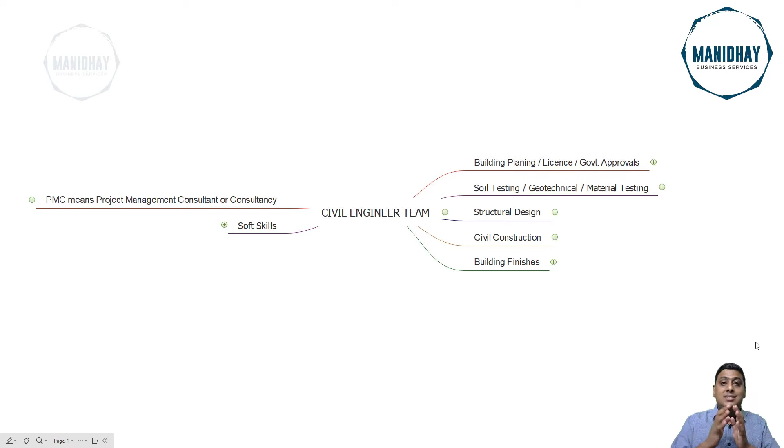In this session, we will be discussing more about the civil engineering team and how to build a team. This is very curious for people who are fresh in the market - fresh graduates, students, or people working for a company who don't know how to set up a team or a complete civil engineering team. I have covered only a few of the teams, you can name n number of teams. So as a basic civil engineer, if you have to put up a team, this is the team we are going to discuss.

We'll start with the first one: building planning, license, and government approvals. If you are a civil engineer, you should know how to get the license done for a client. If you don't know how to get the license done, how will you build the house for him? If you know how to get the license done, the client will ask you whether you know how to get the license. You will tell him yes, we have a team of people who work only for this, clarifying whatever the government officials need, and you will get the license done by the end of the day. If you give the client confidence, he will give you the job. Once the license comes, it is easy to take up the next job.

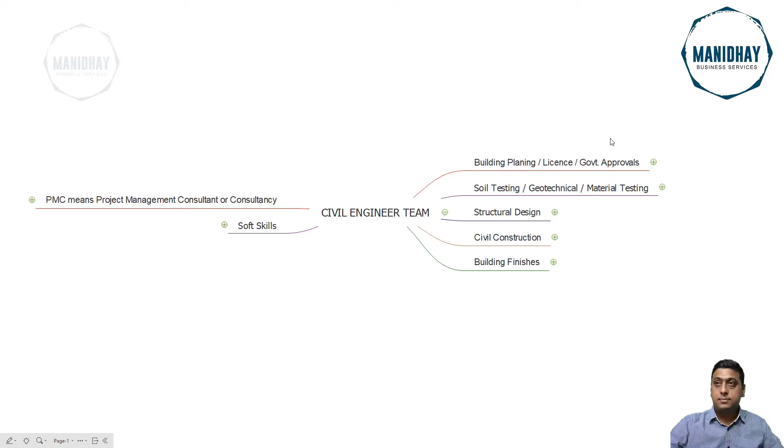We'll discuss now building planning, license and government approvals. First and foremost, before starting any kind of planning, you should have a survey team.

What they will do is demarcation of existing land as per the documents. For example, if you have a layout of residential sites, the surveyor will take the layout drawing and demarcate if the site number or boundaries are not placed properly. He will survey it properly and demarcate your land from others, and tell you this is your land, you can start construction. This is very important, so you should have a survey team who can do this job.

Then contour survey - if the land is very slopy or uneven, you can ask your survey team to get the contour survey done, because of which you'll know how much you have to fill or cut, how to utilize the land properly and economically. You can get a conclusion from that.

Also, to do the actual architect planning, you require the contour drawings. For example, a school project - if you have a survey team, he will survey the complete boundary. A school project will not be like a 30-40 site, it will be acres - you may be having 5 acres, 6 acres, a very huge land. He will survey it and give you the survey drawing according to the need of the school.

As per client requirement, you can tell him stage-wise construction. In stage 1, we'll put up the primary, like the nursery block. In stage 2, we'll put up the secondary block. Next, the higher school like college, laboratories, field - where exactly the field has to come, the toilets, the dining area, the cooking area, the storage rooms. Accordingly, if you don't have the survey sketch with you, it is very difficult to plan. So you should have a survey team with you before starting any kind of planning.

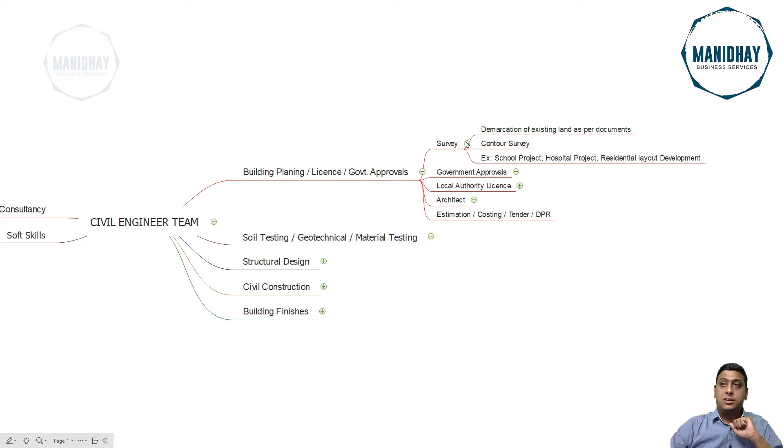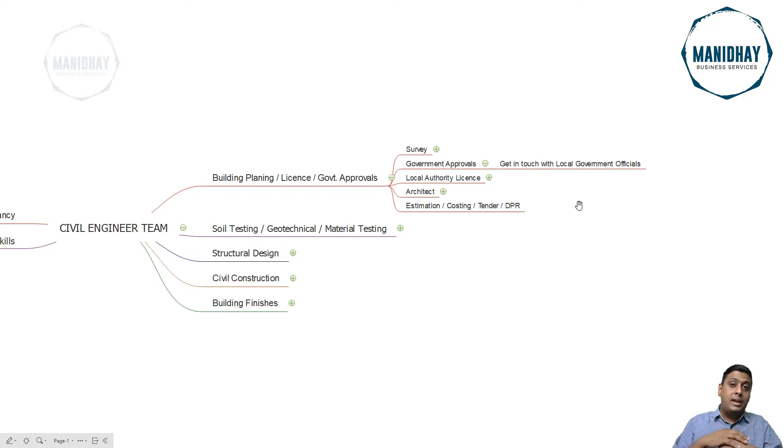Once you get the survey team and all the documents, you can place all the buildings as per government rules and regulations, then apply for the license. Next, government approvals - get in touch with the local government office, get the bylaw book with them and see what exactly the bylaw is saying. Accordingly do the building planning drawing, or else if you submit the drawing to government officials, they'll send it back and reject it if it's not as per government rules. Therefore, keep in contact with the government people.

Local authority license - have a civil engineering license from the local authority. If you are a civil engineer, you should have a license from the local authority that you are a civil engineer. Also, you should have a trade license.

Next, trade license to upload online. Like nowadays in Karnataka, Nirmaan software is there, wherein you are applying all kinds of licensing drawings online. The drawing will be checked online and submitted to the particular government office online itself. They'll give you a code, so you have to just tell them the code. They'll check the file, tell you whether it is correctly uploaded or not, and either send it back or put it to the next office for approval. So you should have a trade license. If you don't have one, you cannot upload the drawings.

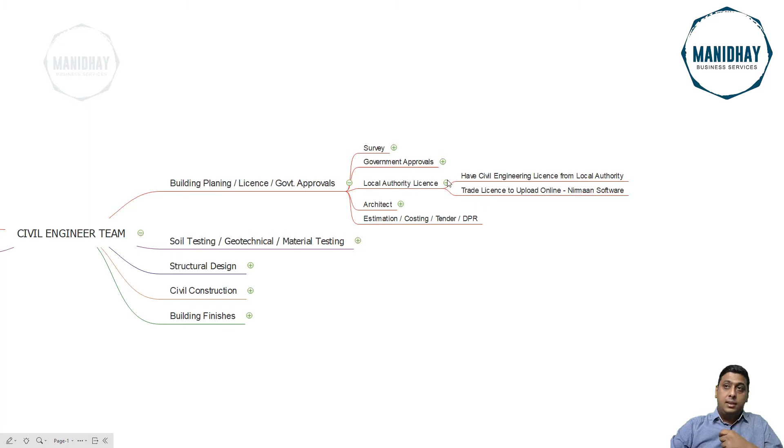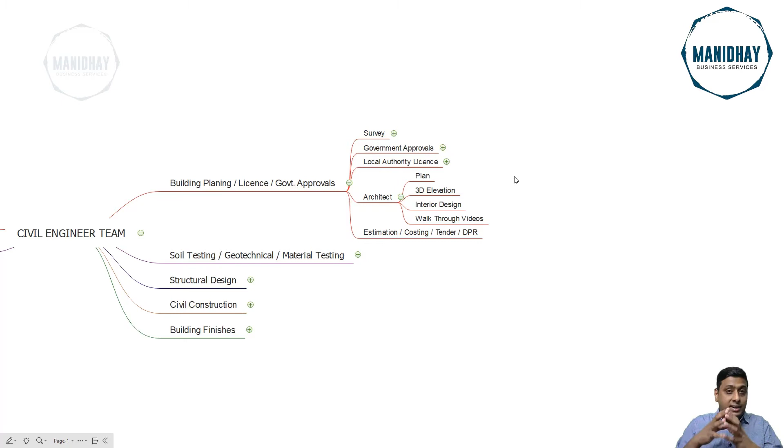Next, you should have an architect team to do the plan, the execution plan, 3D elevations, interior design, and walkthrough videos. If you have an architect team with you, the license drawing is separate, and the execution drawing is separate. The license drawing will be given to the government authorities to get the license done. The execution drawing will have more details compared to the license drawing. So you should have an architect team with you, or if you don't, hire an architect team to be a part of your civil engineering team.

Next, once the architect plan is ready, you have to do an estimation, do the costing, do the tender for it. So you should have a team for it. I'm telling you once again, don't do all the work on your own, because you cannot give justice to all the work. Sometimes you will do a lot of mistakes in some of the works which you find difficult to do, or because of time constraints you will just do the work and send it to the clients.

So because of this, you should have a team of people. I'm not telling you to hire everyone; there are a lot of people who work freelance. Have a team, okay. You should not hire them as a monthly salary kind of thing; you can give them the job and they will get it done as a part of your team. So you should be having an estimating and costing team. This is about the first one.

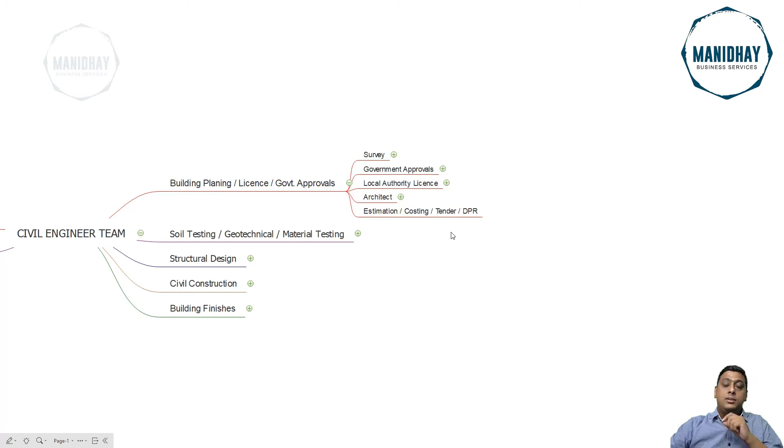Next, soil testing, geotechnical. Once all the plans are ready, you have to get the soil testing done, because it is the first and primary thing the structural engineer requires. If the soil is good, the foundation cost will be reduced. If the soil is bad, they'll tell you what treatments have to be given, how the foundation size will increase, and all those things properly.

So collaborate with the local engineering college; they will have a soil testing laboratory setup done. Give them a letter that you have a client who wants to execute the job and get the soil testing done. They will send their officials and get the soil testing done. Or you might get in touch with a third party soil testing consultancy, a certified consultancy. Get in touch with them, tell them to be a part of your team, since you have a number of projects. For example, if you get a road project, you should check the CBR test at regular intervals. So at that time it will be very helpful.

Next, owning your own soil or material testing laboratory, advantages and disadvantages. If you have your own soil testing or material testing laboratory, the advantages are more. Whenever a government project starts, they will be in search of consultants who can get all their materials and soil tested at one place and get all the results from the consultancy. They will pay you in percentage, varying from 0.1% to 0.5%, 1%, depending upon the type of structure. 1% of the total project cost - just imagine if it's a 100 crore project, how much you will earn. If you have your own soil or material testing laboratory, those are all the advantages.

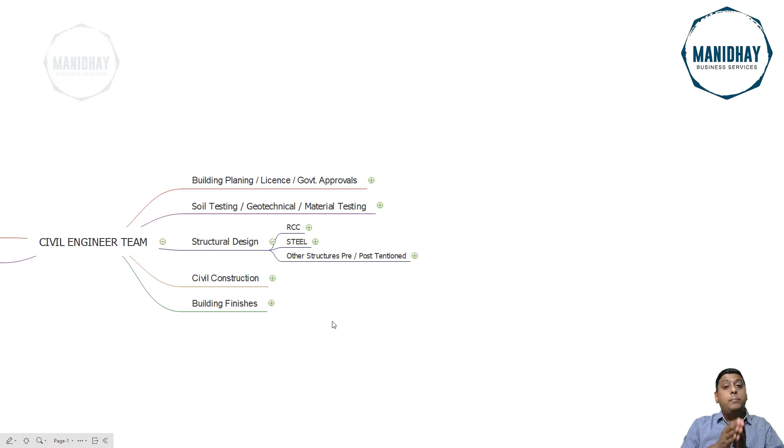In structural design, what exactly are you doing? Are you doing RC design? Are you doing steel structure design? Or are you doing pre or post tension structure design? So let's just see the RCC.

In RCC, generally individual houses, apartments, small apartments, and community villas will come under RCC residential building designs. Next, commercial buildings like hotels, shopping malls, small and large scale, they are doing it in concrete only, hospitals, airports too. In the airport, steel structure will come, but the substructure will be concrete only. Institutions like schools and colleges will do it in RCC. Then industrial small scale buildings will also be in RCC.

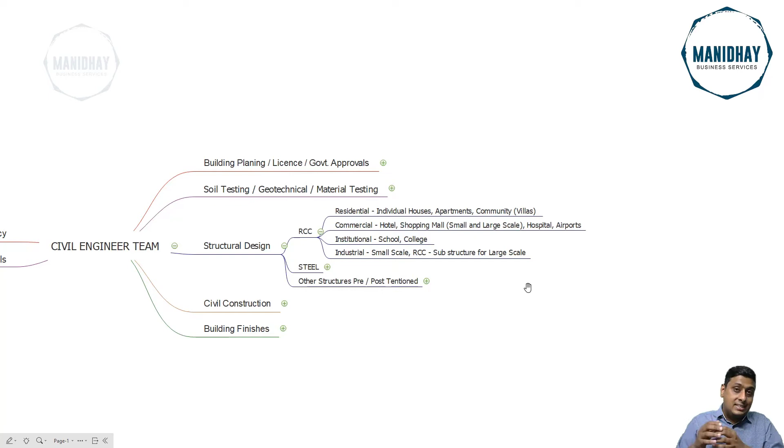Large scale industrial buildings will be in PEB, pre-engineered building steel structure. But for that, the base structure and some of the foundation structures for the machineries will be RCC. So whether you have expertise in designing RCC structures, take only that kind of consultancy and design which you can give justice to, which you can give proper results.

So next we'll see the steel design. In steel also, commercial and institutional, residential building steel structure is very rare. Commercial and institutional like airports, shopping malls, hotels, schools, colleges, there steel structures are there. Till today it is booming up, the steel structure. So many people are constructing using steel structure itself, because tomorrow if they don't want to continue that business, they can just remove it and use the steel for some other purpose.

Next, industrial structures like piping racks in the industries, PEB structures as discussed, warehouses, roofing trusses, all will be in steel structures. Car parking, small sheds, temporary storage units, all these things come under steel structure. If you have expertise in steel structural design, you can take all these kinds of consultancy.

If you are expertise in RCC but not in steel structure, what you can do is hire a team of people, or hire a person as part of your team, and take the service from that person. So to form a complete team, you should have all these specialized persons in your team.

As a civil engineer team, it should be complete. You cannot tell the client, I don't have this service, I cannot give you this service. It's not correct. What you can do is just tell him, yes, we are having a team, I'll just consult with my technical person, and in 1 or 2 days I'll come back to you. You can take that breathing time.

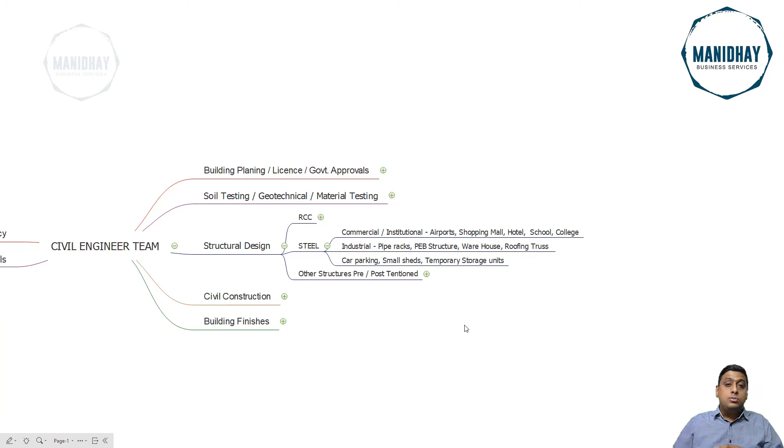You can go to LinkedIn, or go to your friends and colleagues, search for that person, connect with them, tell them this is the kind of job we have offered, so if you are interested you can be a part of our team. Definitely they'll be in the same kind of situation as us, they also need the job, so they'll be a part of your team. This is about the steel structure.

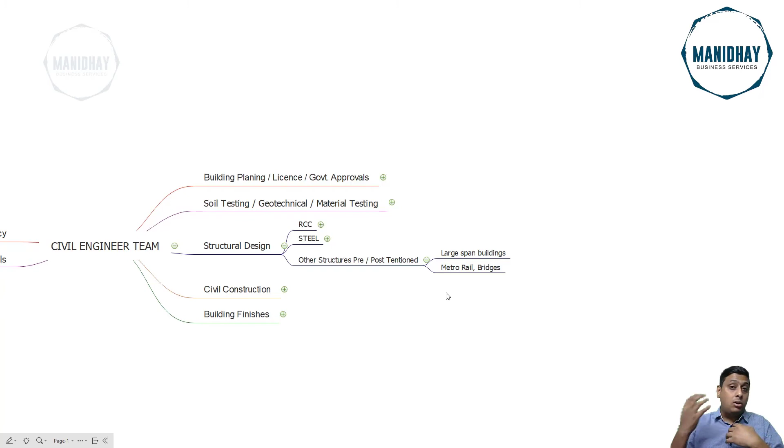Like pre and post tension structures, large span buildings or metro rail bridges, these are all large scale projects. I'm not saying we cannot do it, definitely we can be a part of this also. We can get inquiries for these kinds of structures too.

Next, the construction part. The planning is over, soil testing is over, we have got the design. So what you have to do is the actual civil construction. For example, if you are a structural designer, you are not doing any construction activity.

What you can do is hire local engineers who are already doing the contract or civil engineering construction. You can tell them we are having a project, a residential building. I'm having a client, I'll tell him we are having a team of construction, we will handle the complete project. Whether you are interested, if he is interested, he'll tell you yes, I'm interested, I want that job.

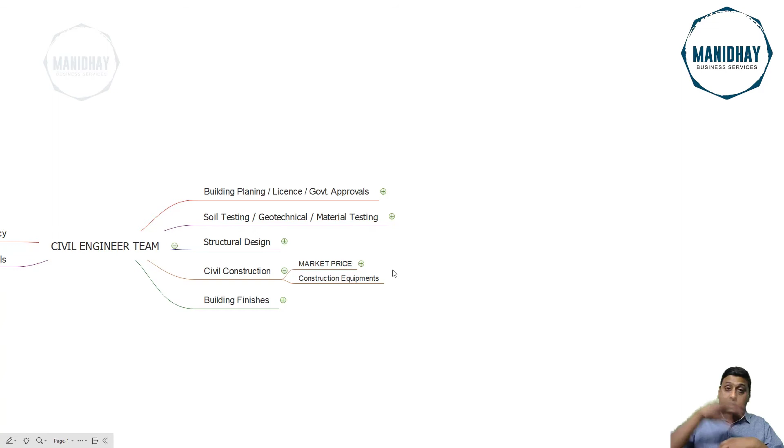So what you can tell him is, we will share the profit, okay, because I'm getting the client. From your profit, you can give me 10%, 15%, or 20%. We can come to an agreement. Then I'll tell the client that we have a team and will execute the project. The client will be happy because everything gets done at a single point, he shouldn't have to run behind a lot of people, correct? Even the person who comes to you might get you a structural job later for his clients. This is how the business grows.

When you start civil construction, there are some important points to observe. What is the price running for labor in the market? This is a prime factor you should observe, and you should get this information fast, because labor rates vary due to a lot of situations. The mason rate, the male helper rate per day, the female helper rate - according to your job and requirement, you can hire a team of people as per your payments and requirements.

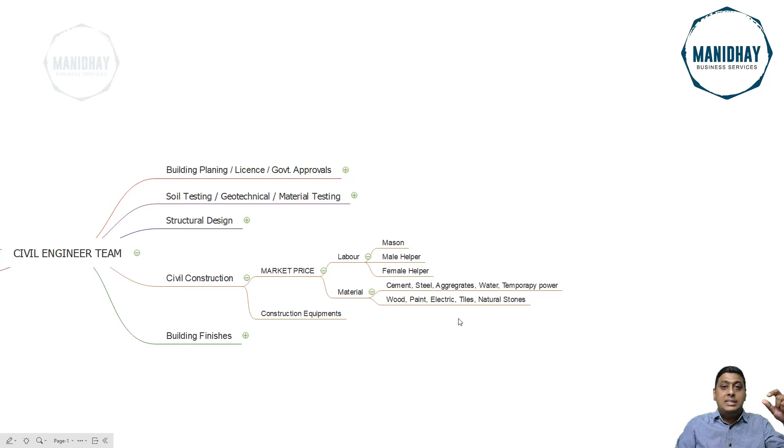Next, material prices - this is very, very important. When you get connected with local retail people, you'll frequently get these prices. You can just call them and ask what is the price of cement today, what is the price of steel today. If you keep these updated, you can maintain an Excel sheet with date, serial number, and price - a cement file. Just call them in the morning, or ask your juniors to call in the morning and get the price. If you have this data, it will be easy to get the quote for the client. If the cement rate is 380 rupees, what quote do you give? If it's 280 rupees, 100 rupees down, what quotation do you give? You can give the best price for him, correct? These are the advantages of getting prices updated every day.

Also about construction equipment - you might require a lot of equipment for your construction activities, like dozers, excavators, correct? Depending on what construction equipment you require, like concrete mixers, you contact that vendor and get the equipment on rent, or you can even own the construction equipment. If you don't have a construction team, as a civil contractor, he will be a part of your team.

Building finishes like carpenter, painters, electrical contractor, fabricators, tiler - these people are very important, because at the end of the day, people will see only these things. They'll see the wood used for the windows, the design done, what kind of wardrobes in the interiors, what kind of paint, what design of paint, whether they've used royal play kind of finish. The electrical contractor - what kind of lights they've used, what switches they've put, any new technology used for security purpose. And the fabricator - if you've done a small steel structure, maybe the balcony or portico, whether they've given any design for it. If there's a tile layer, whether the tiles have been laid properly. And also one more person, the plumber - he is also involved in building finishes.

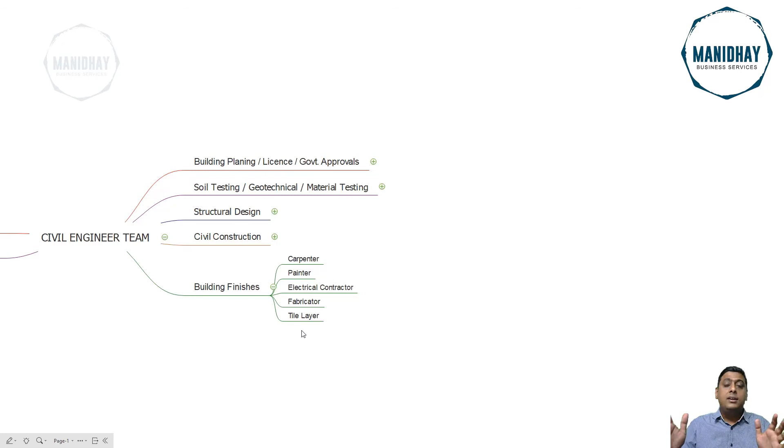If you don't have the person, ask around, you'll definitely find them in the market. Tell them you have a job, they will be part of your team. It's very important to develop a team - it's not difficult at all. You have to get connected with people in time and tell them you have a job. Definitely they will also be seeking and searching for a job, and you will give them the job. Tomorrow, what they will do is tell their clients that I'm having an engineer, we have a team, so you can connect with them. They will get all your jobs done.

Okay, next, PMC - the project management consultancy. This is one of the best consultancies running in the market. They will handle all the project management - they will see the progress of the project and schedule it.

They will see to it whether that project's progress is on time or not, why it is delaying, what is the cost, what is the quality standards, what are the standard charts that have to be followed on the site. These things are done by PMC people.

If that quality is not maintained, for example, if you have to put M30 grade concrete, the PMC people will have an engineer from their side, while you have your own team executing the project. The PMC engineer will come, take some 3 cubes from the concreting that day, and give it for testing. If the grade of concrete comes out as M25 in place of M30, he will complain to the higher authority, so it will be a problem for you.

But the PMC guy is just seeing to the quality standards, it's his responsibility, his job, and he's doing it the correct way. So if you are having a PMC consultancy, you can offer these kinds of jobs too. People give their projects to the PMC people so that they can sleep aram se, correct? They can be confident that the product they are getting is 100% quality product.

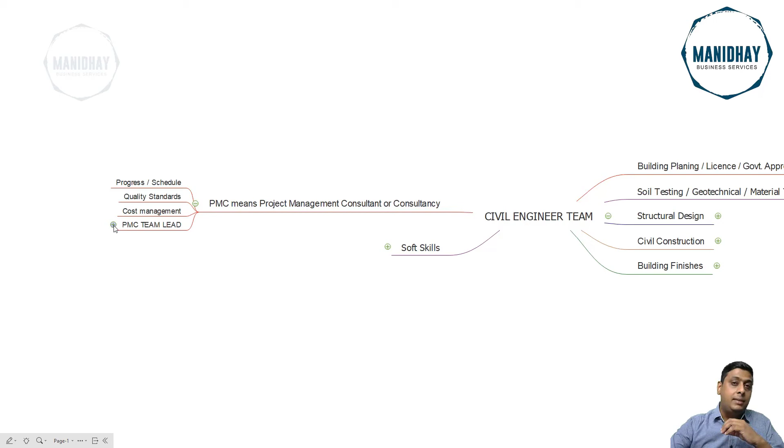If you want to get a PMC team, you should have a lead engineer, a senior-most civil engineer with vast experience and exposure, as your team lead. Or else, if you appoint a junior engineer, he will not have that experience, or he might not know the standards, and you'll be in trouble.

So this is about the PMC. This is one of the booming industries, you can see to this.

Soft skills, for example, you might be in need of doing a small drawing. You will not be having time, so you can hire a person, or you can find freelance people through LinkedIn or some other platforms, and tell them we have certain drawings to be done, be a part of our team and get it done. Like this, analysis software, design software like STAAD, Tekla, ETABS.

Why am I telling you all these soft skills? Because some clients require certain things in a particular software. They want their structure analyzed in ETABS itself, but you are specialized in STAAD Pro. End of the day, both will give you the analysis results, but the client is not aware of STAAD Pro, he will tell you it has to be done in ETABS. If you are not good enough to do the analysis in ETABS, you can hire a person, or take a person who is doing freelance work and get things done.

That's it. You are a consultant, you are giving a job, you are giving the service, you give all the service to your clients. When you give all the services to your clients, what happens is tomorrow the clients will come to you directly and inquire about each and everything with you. When they start to inquire with you about everything, you get more confidence that you're getting good jobs, you're making huge amounts of money now.

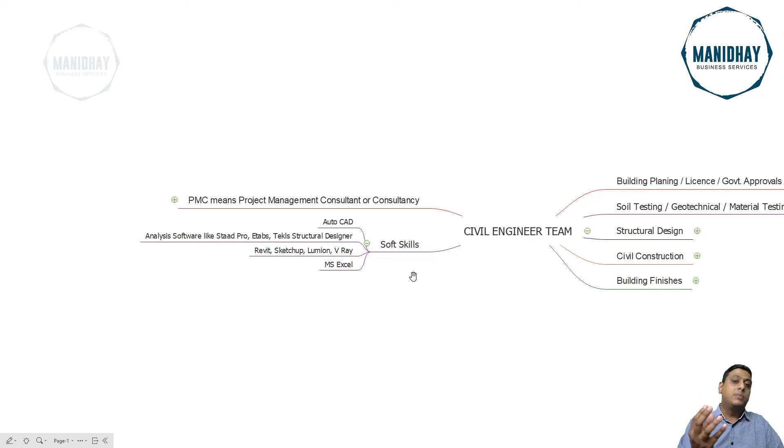When you are having only one type of consultancy, what happens is, in the place of earning this much money, you'll be getting only this much money. So build a team.

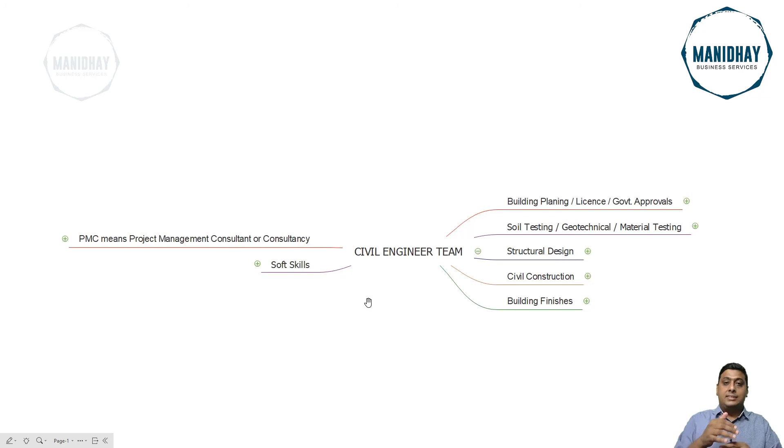Next, as a fresh graduate, if you are getting exposed to this kind of situation, what you can do is, at least from now, start connecting with people who are doing consultancy. Tell them you have expertise in this, I want to be part of your team. What happens if you are part of some other team is you will know what exactly they are doing, what type of clients they are coming to them, what jobs have been offered to them.

So by doing that, as a fresh graduate, for maybe 1 or 2 years, you can offer certain jobs by yourself to clients, telling them, for 2 years we had a material testing laboratory, now we are expanding our team for structural design also. How did you get to know about this? Because you have the knowledge of how to set up a civil engineering team now, correct? So implement this knowledge with others. What exactly others are doing, just see, observe, hear, learn, implement.

That's it. If you are working in a company for the past 2 or 3 years, what you can do is, now that you have the knowledge, you can observe the atmosphere, what is happening in the market, in your company, what kind of clients they are getting, how they are handling it, what the HR is doing, what kind of people they are hiring as freshers, what services they are giving. So you can go around your company, talk to your seniors, team lead, or colleagues, and get more information to set up your own consultancy.

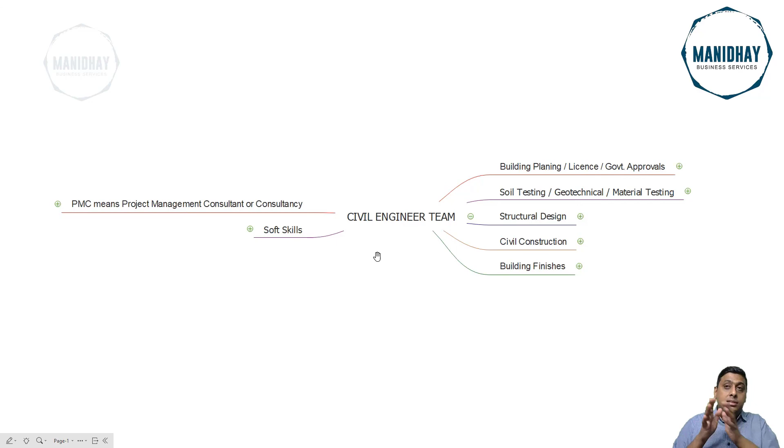So this ends how to set up a civil engineering team. This is the most important topic of all the topics we have discussed, because it is most interesting to set up a consultancy.

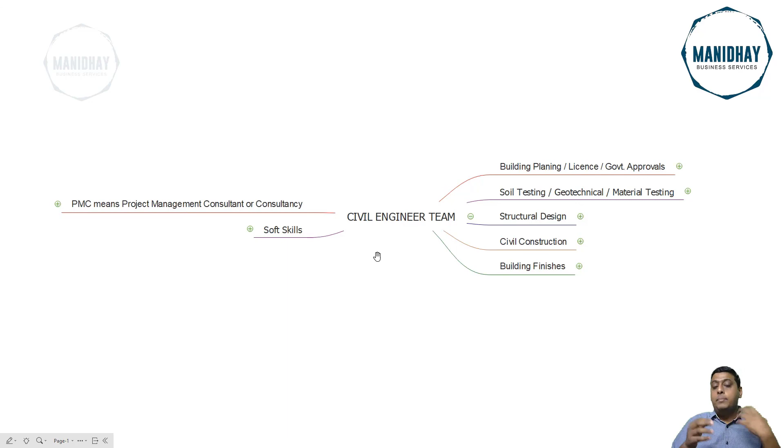We'll see you in the next module, which is more interesting than this, how to do an online consultancy without going to clients directly. You can set up a consultancy online and see what kind of services you can offer to them. We'll see you in the next module. Thank you.